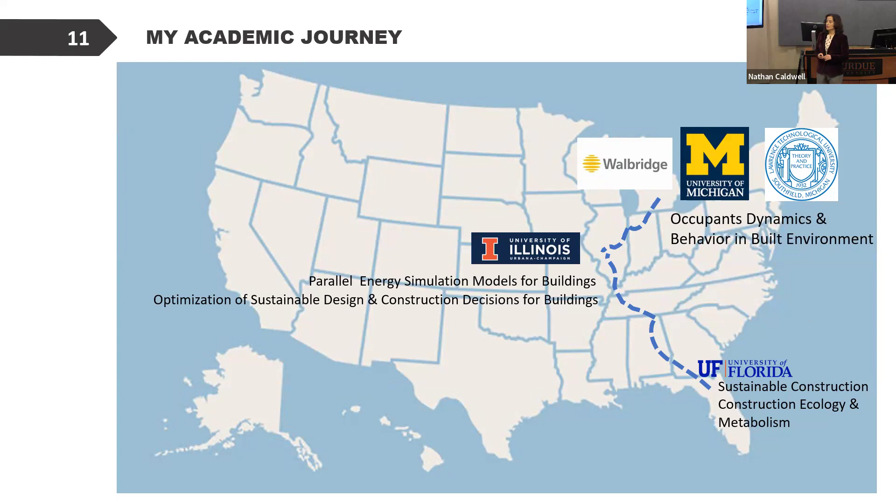Then I moved to University of Michigan, and I also worked at Lawrence Technological University, with a part-time consultancy job at Walbridge. At that time, I was mostly focusing on occupant dynamics and behavior in the built environment. So 2.5 years ago, I finally moved to Chicago, the beautiful city, to UIC, and I was finally able to found my own research lab in building technology and science — the Built Environment and Infrastructure Lab.

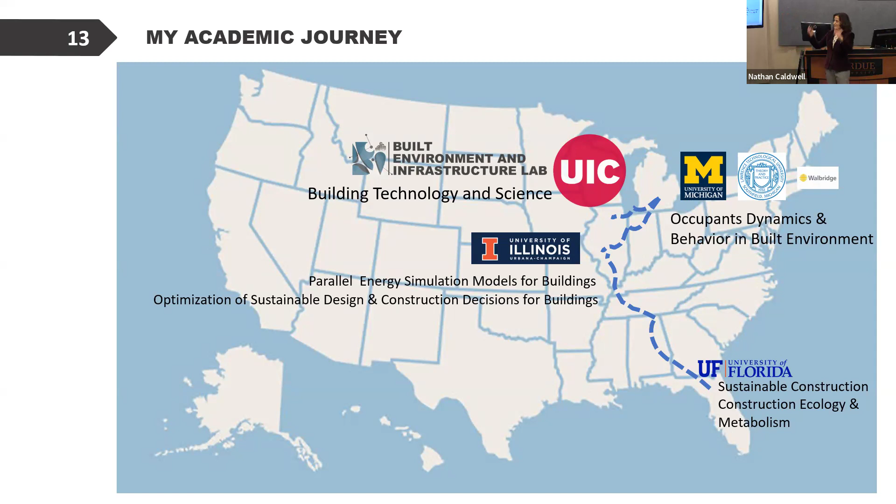So with this journey, starting from the very south of the United States and going north, what I learned is, especially learning the fundamentals of construction ecology and metabolism, then working on these computational simulation models, which are widely used by engineers, designers, architects, etc.

I mainly use Energy Plus to develop my algorithms on top of that. But I noticed that even if it's widely used, it has two big gaps.

One is it doesn't include the occupants' behavior. It assumes that in the simulation programs all the occupants behave in the exact same way, which is not the real case. That causes some inaccuracy between what you usually simulate and what you get in real life.

And then what I also noticed is that these simulation programs also don't take into consideration the weather changes or how the building envelope system will adapt itself over the course of years of aging, and also for future climatic adaptation.

So with this in mind, that's the vision of my current lab. We work on investigating climate resiliency adaptation for high performance built environments, always keeping the human in the loop. And these are some of our collaborators.

This is the main area that we're working on. I want to talk mainly about climate change adaptation and the innovative methodologies that we're developing. That will be the main focus of my talk today.

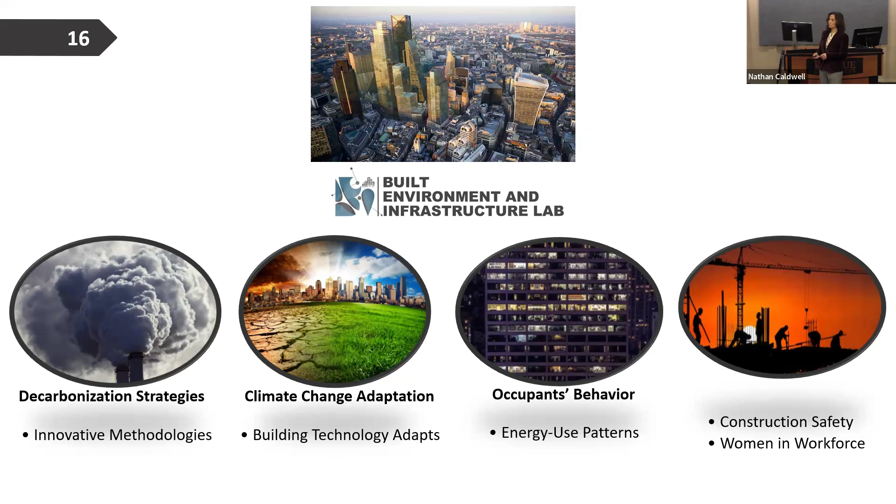We're particularly focused on building envelope systems, and let me show you why first. It's become common knowledge that 40% of building-related energy consumption is coming from buildings, and buildings are also responsible for 40% of carbon emissions.

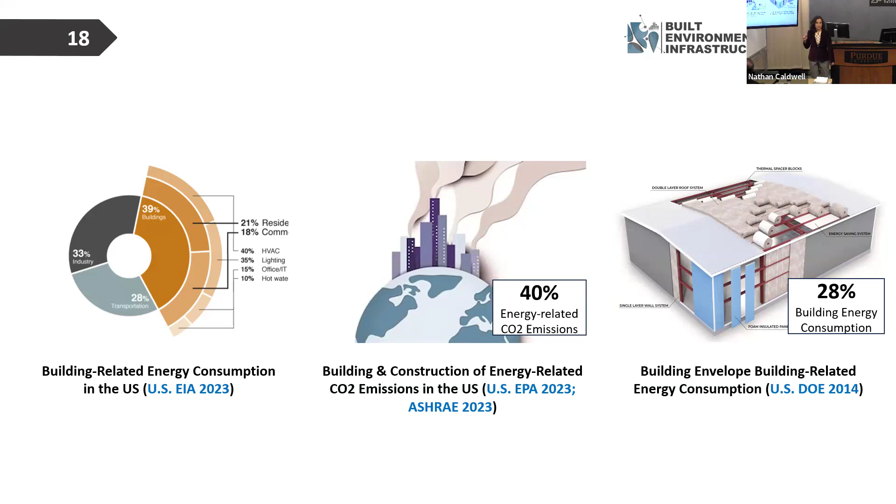Among that 40%, 28% is about the building envelope system. So when we say building envelope system, we're talking about roof, walls, windows, foundation — whatever encloses the building itself.

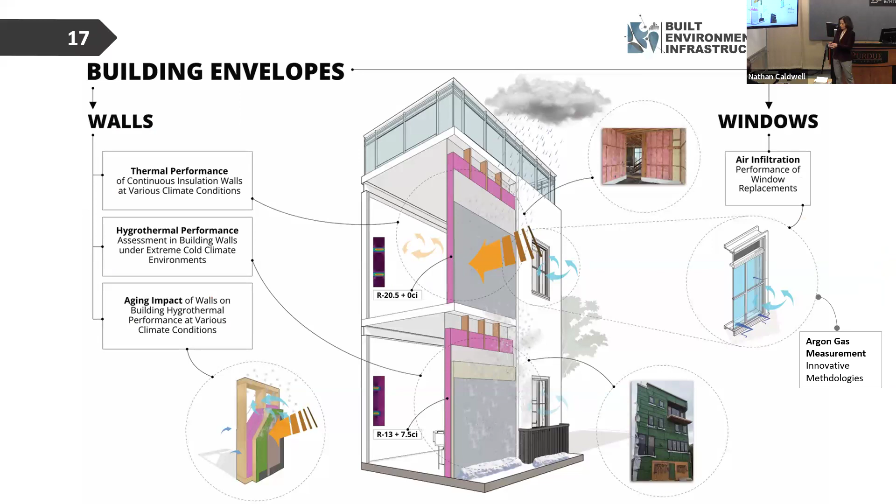But particularly, we're focusing on walls and windows. The reason is that among that 28% of energy consumption, walls and windows make up more than half of it. And if you include some of the leakages, improvements in wall and window technology systems will help us a lot in figuring out adaptation strategies for construction.

As we know, the building stock is getting old and aging in the United States, and new technologies are coming out to improve overall insulation, thermal performance, and moisture performance of these buildings.

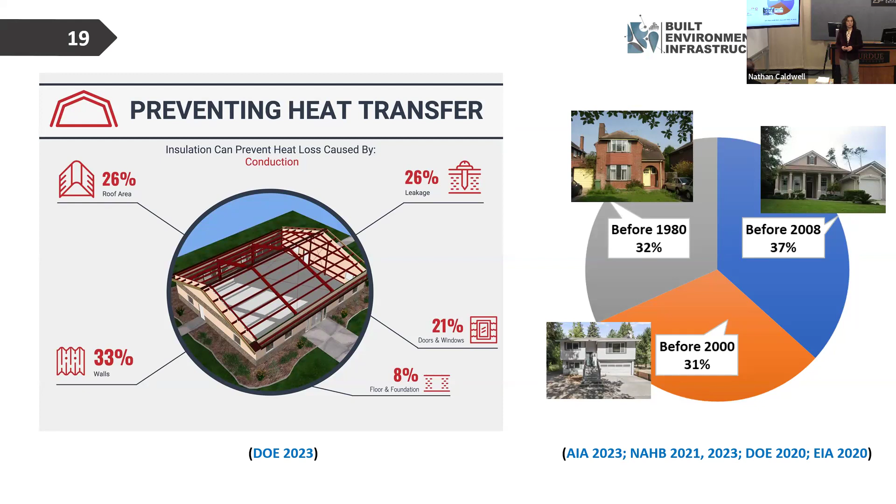So we want to see how these are working and how they're going to perform over the course of the years, keeping climate change in mind.

I'm going to talk about the research studies, but first I want to introduce our two handsome guys — we have two walk-in environmental chambers. This one was made from scratch, and my students and I are very proud of it.

It's able to do tests from -4 to 212 Fahrenheit. This chamber helps us put wall samples and window samples in the middle, and create weather simulation conditions based on ASTM and ASHRAE standards.

The testing sample size we designed for this one is 5 by 5, so anything up to 5 by 5 can go in there.

A couple of months ago, we received a more sophisticated walk-in chamber. It has a wider temperature capacity, which can also measure from -40 to 212 Fahrenheit of weather conditions.

On top of that, we can also simulate wind and rain experiments in this environmental chamber, so it has a wider range of testing capability. We have two rooms here.

One side represents the indoor air quality and indoor weather conditions, and the other side is where we change the outside weather conditions based on whatever we want to simulate.

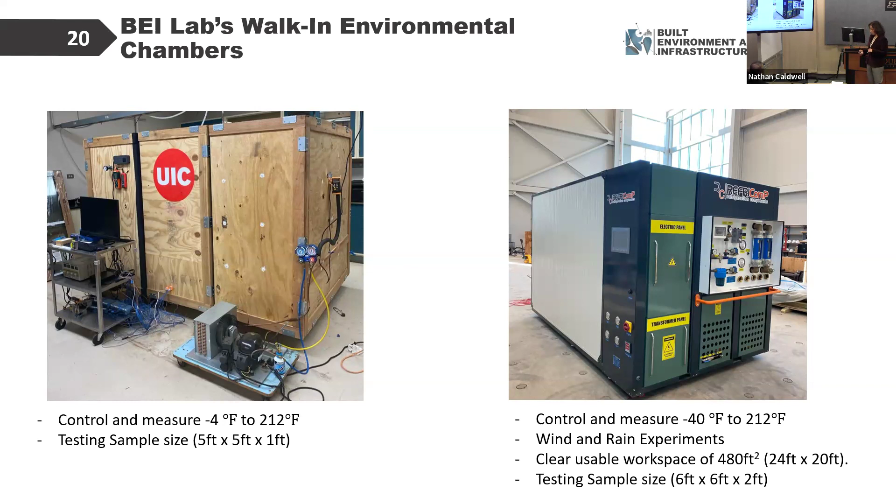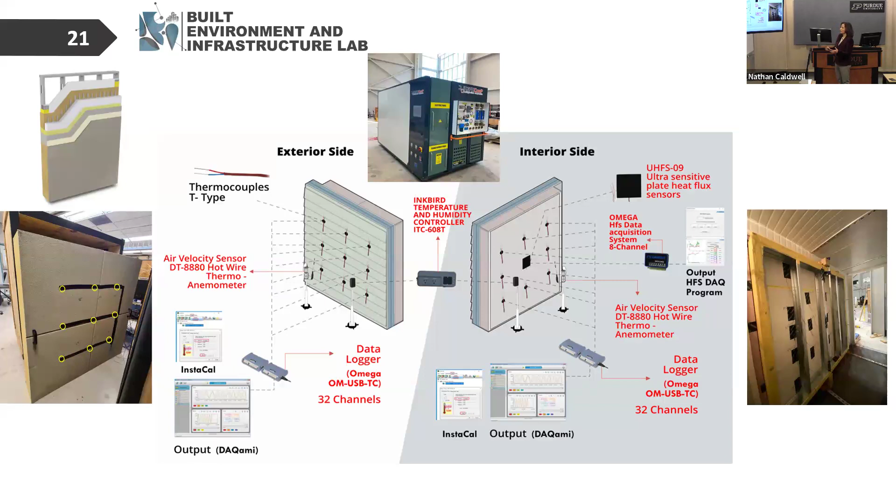This is kind of typical how the experiments look like when we do experimental stuff. So we have the two sides: this is the interior, representing room temperature and room conditions, and this side represents the outside temperatures. And of course there's a very complicated, sophisticated data collection system in the background that helps us run these simulation models.

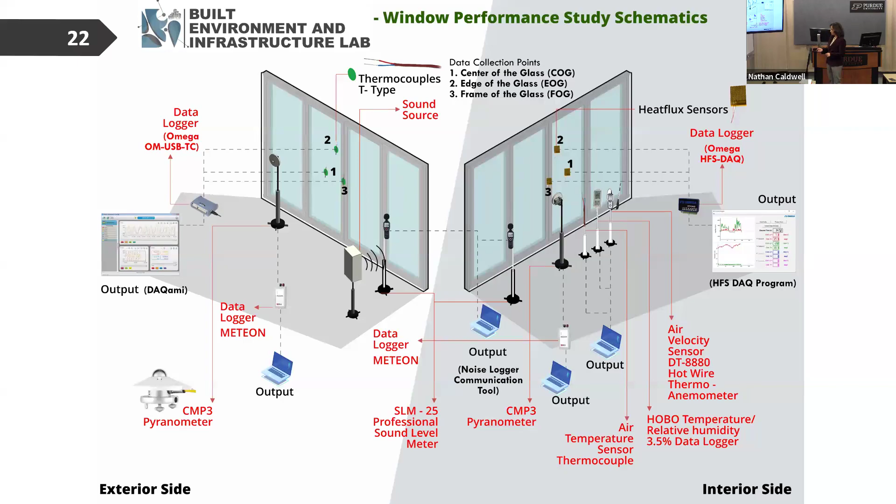Okay, so let's start with walls. I'm going to talk about walls and windows. Walls is going to take a little bit more time than windows, but I'm going to give you an idea of what we are doing, a taste of what we are doing.

With the walls, we were actually approached by a big industrial construction company. I don't know if you're familiar with industrial construction, offsite construction—anyone heard about it? Modular, maybe a student, or of course the professors. I believe it's going to be the future of construction, especially after COVID. We found out there are so many advantages of these industrialized offsite construction systems over the traditional ones. And once we were approached by this big manufacturer of panel technology, we got excited because they said they have some unknown territory that they want us to explore.

But let me show you, especially for students who aren't familiar with what I'm talking about, I'd like to show you this very short video to demonstrate how the manufacturing process, transportation process, and installation process works with these industrial construction wall assemblies.

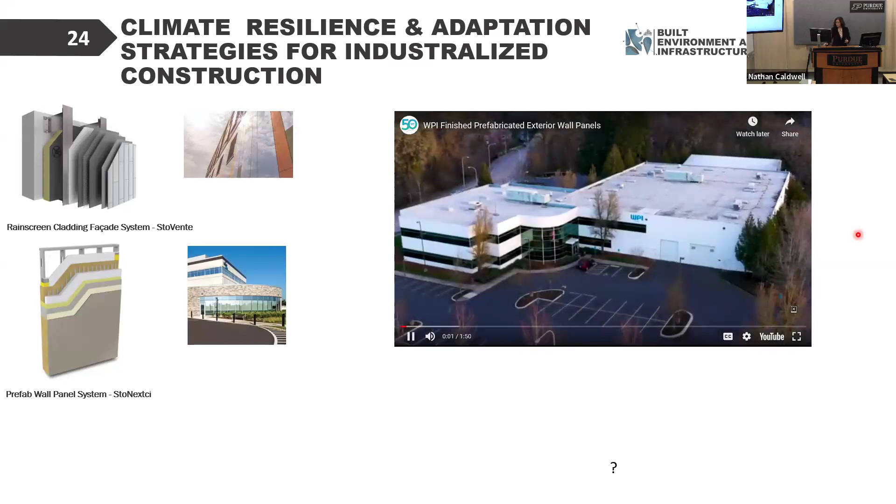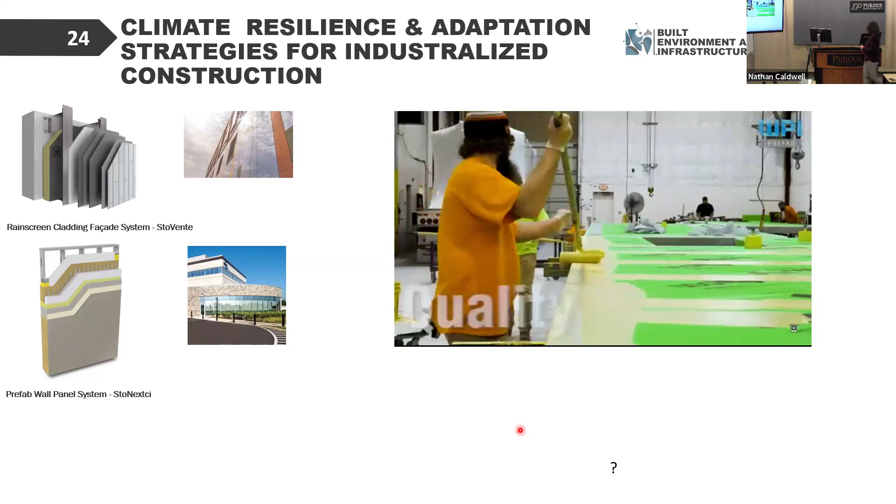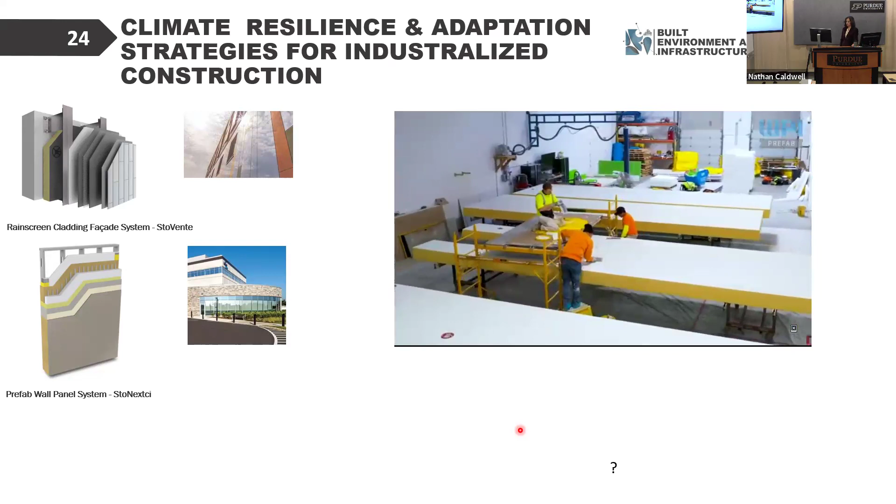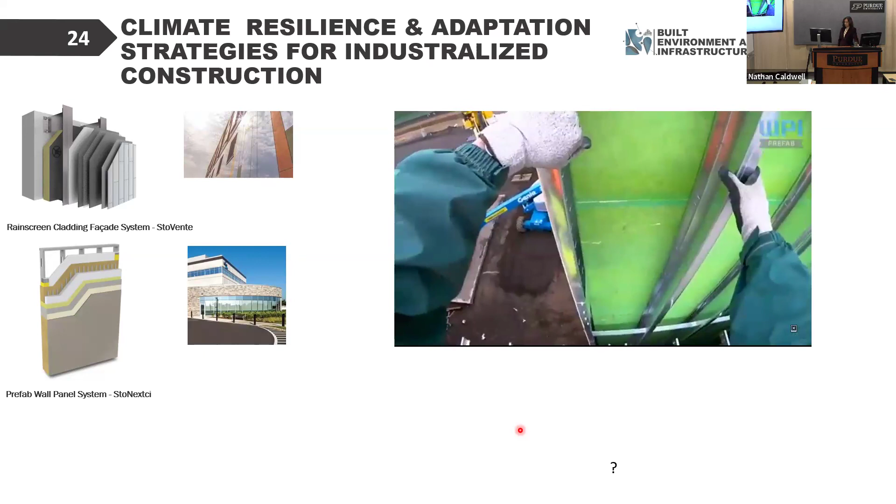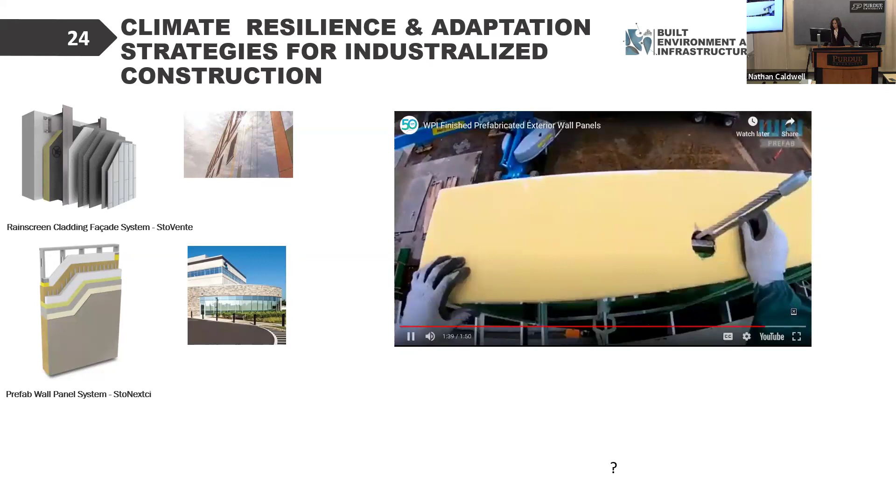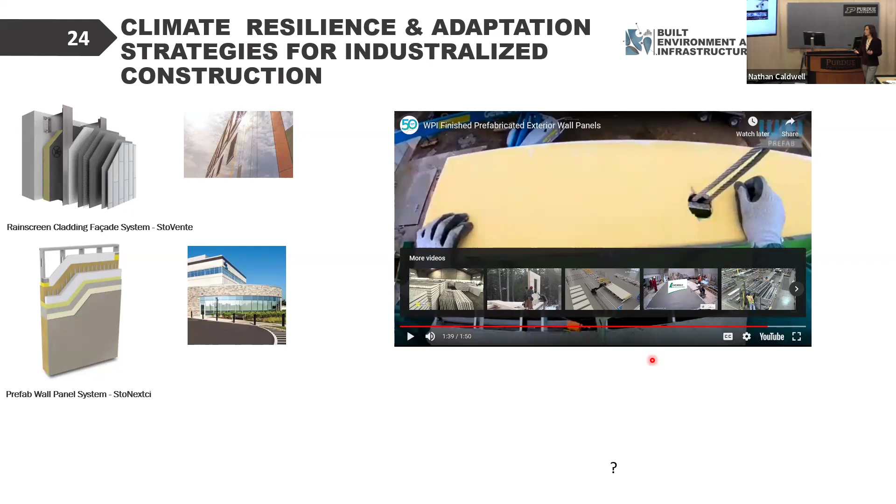This is another rain screen system, as they call it. Again, it's a very similar process, used for a variety of buildings like hospitals, high-rise buildings, warehouses, residential buildings, you name it. So that's the thing that we started working on. And then we got a question from the manufacturer—let me move on to the next slide.

The question we got from the manufacturer is that, in the industry, they mostly find the thermal performance of this kind of wall assembly and window assembly using a software called Therm. It's a widely used software for designers, engineers, and architects, and they measure it based on given drawings, technical drawings, and specs to find out the thermal performance, mostly measured by R value, thermal resistance—the higher the R value, the better your wall is performing. But they were saying, okay, this is a widely used version, but we believe the software isn't actually reflecting what the actual thermal performance of our wall panels are.

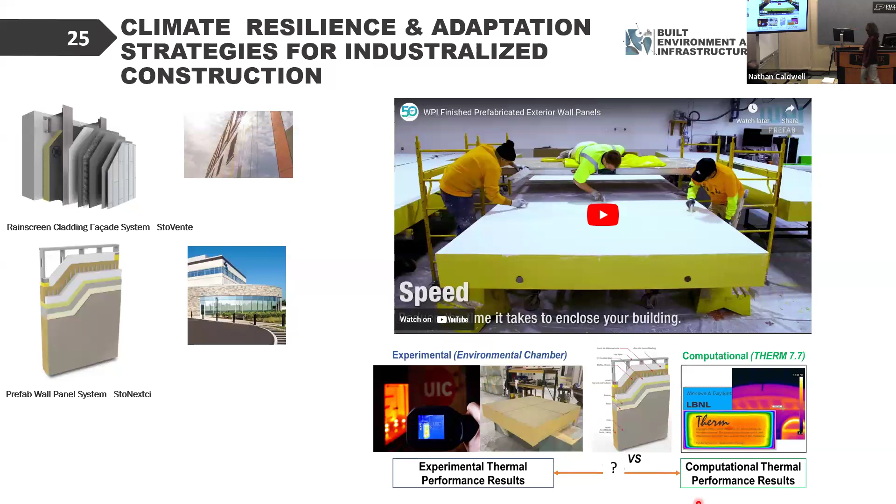Because they believe this testing is mostly done for traditional assemblies like precast concrete, etc., but maybe not actually calibrated for prefab wall panels, we decided that we're going to test these.

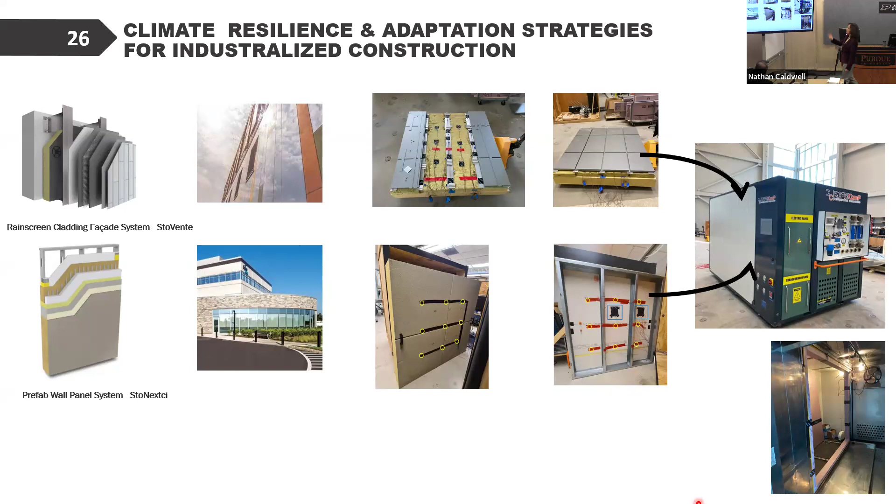I call this like a surgery. We receive these wall panels, open them up, and place our sensors inside - heat fluxes, thermocouples, etc. Then we measure their thermal performance in our environmental chamber. This is how the inside looks like: these are the two rooms I was talking about. This part represents the exterior weather conditions, and this part represents the indoor environment. Your wall comes in like a regular building, positioned in the middle, and then you start measuring the thermal performance if that's what you're asked to measure.

And then there's the simulation part. I'm just going to skip a little bit more on the methodology and get into the results.

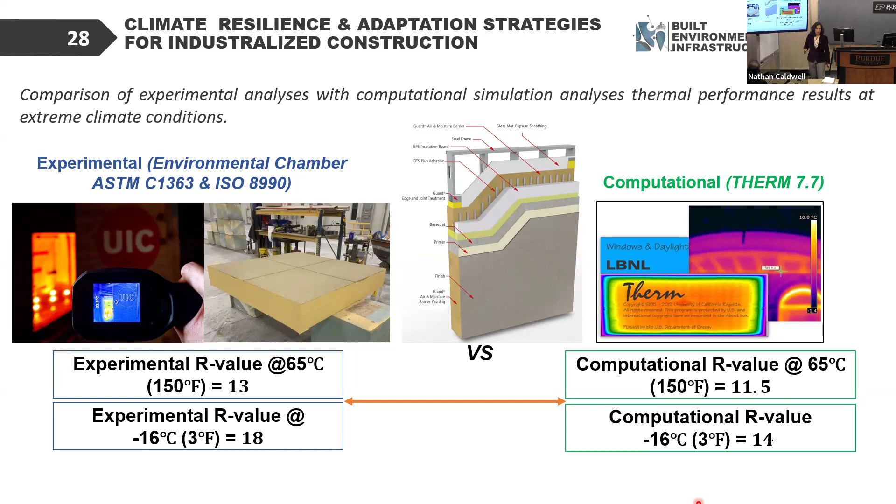Based on our experiments and ASTM standards, we tested them in the range of 65 Celsius to minus 16, or 150 Fahrenheit to 3 Fahrenheit. Those were the boundaries we selected for the Chicago area - the average lowest versus the average highest, including solar radiation. We did the same thing in the computational environment, and found a 17% difference between the experimental versus the computational results.

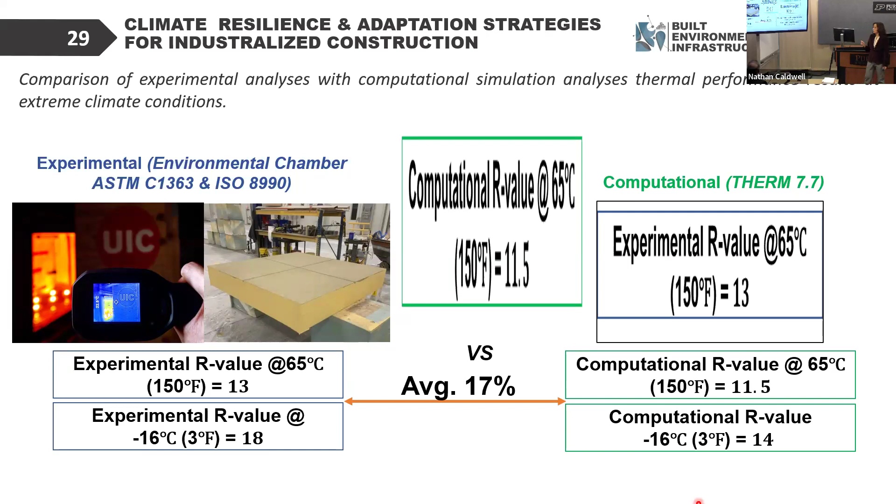That 17% R-value discrepancy is not something you can ignore because it has many implications. First of all, if you underestimate the thermal performance of your wall systems, you'll want to go with a higher capacity HVAC system. That brings along extra utility bills, extra initial costs, and maintenance will be more costly than having something more ideally sized based on the overall performance of your walls.

We specifically worked on hospitals for this case study because the wall we analyzed was mainly used in hospitals. We put this into a typical reference building in Energy Plus, and tried it with the experimental R value versus the computational R value over the course of the life cycle - which could be around 50 years, but from the owner's perspective, 15 to 20 years makes more sense most of the time.

We found that if you underestimate the R value of your wall system for typical hospital buildings, you're basically missing $400,000 from utility bills. That's the equivalent of annually taking 22 cars off the road, or 19 households' worth of electricity consumption. So that 17% discrepancy, if you underestimate the R value or thermal performance of your building, may cost you more money from the owner's perspective.

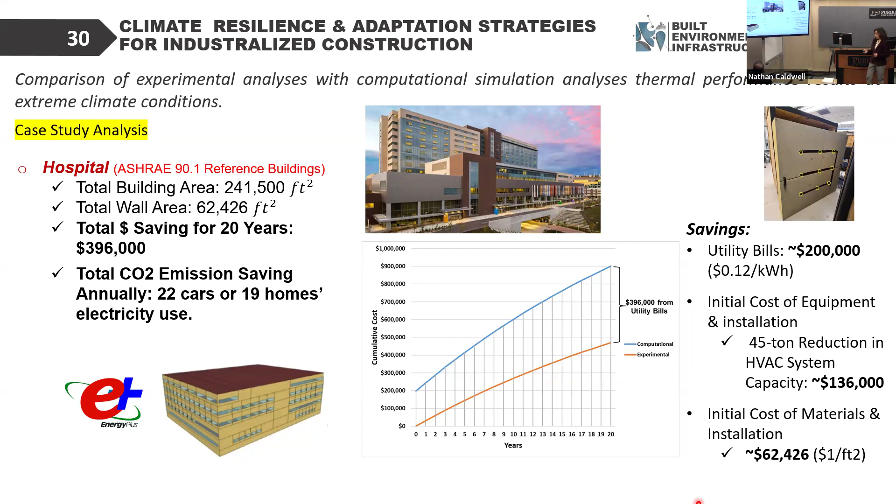After completing this, we asked another question - we're still working on this project, by the way. We're trying to understand what specifically causes that discrepancy, and what needs to be improved or calibrated in the computational simulation environment so it matches the experimental results for industrialized construction prefab wall panels.

We also asked another question about heat waves - the resiliency of these walls. I think this is very important information: heat waves in the United States killed more people during a typical year than all other natural disasters combined. The walls and windows play a major factor when you're sitting in your house or building and exposed to a heat wave.

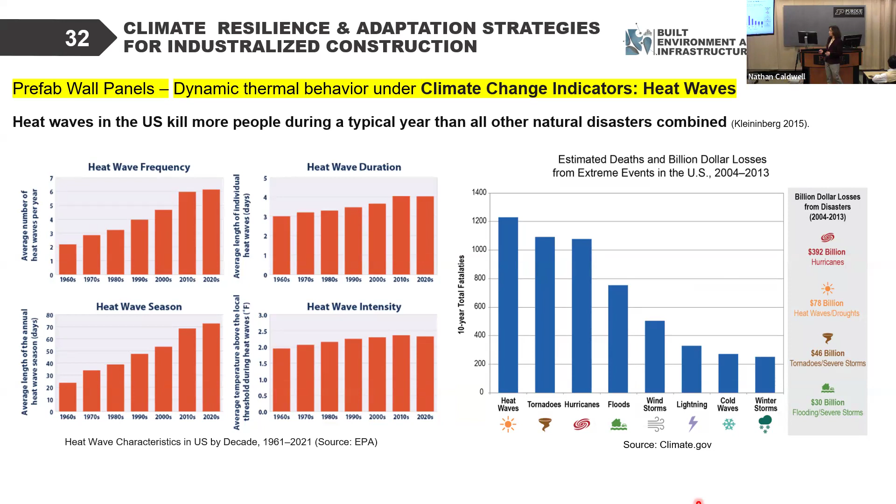So to measure that, we focus on 2 variables. It's kind of different than the R value, because with this heat wave phenomena, you need to understand how the wave is going through your building. So this is your wall, and this is the outside temperature, and the wave is coming in big sinusoidal waves. You want your wall to minimize it and have it penetrate through to the inside condition as little as possible.

So with this one, we have 2 variables. We measured the time lag, and we also measured the decrement factor. Time lag is basically the difference between the 2 peak times in your sinusoidal waves, indoor and outside condition. Decrement factor is the ability of attenuation of your sinusoidal waves compared to inside and outside. You want your decrement factor as low as possible, as minimal as possible. And you want the time lag as long as possible, or as big as possible.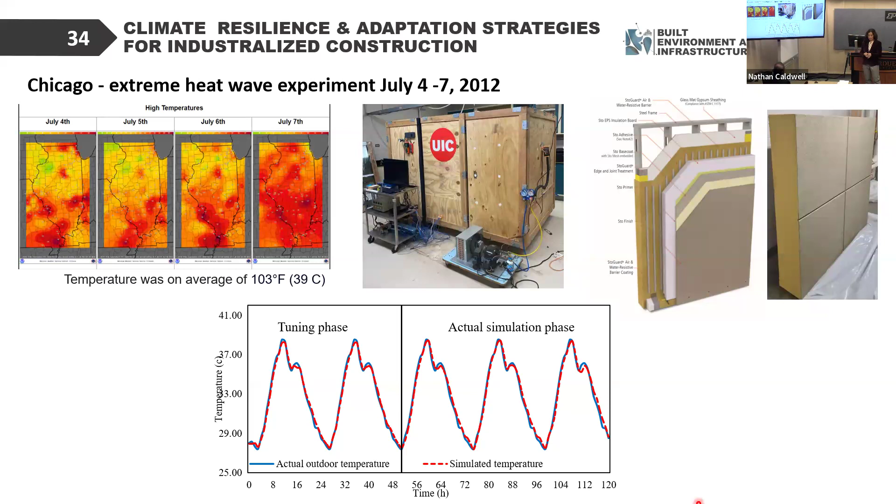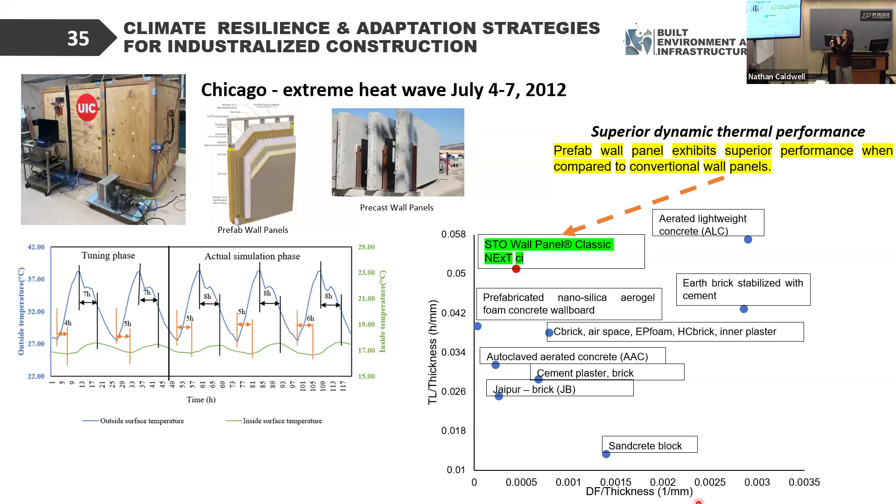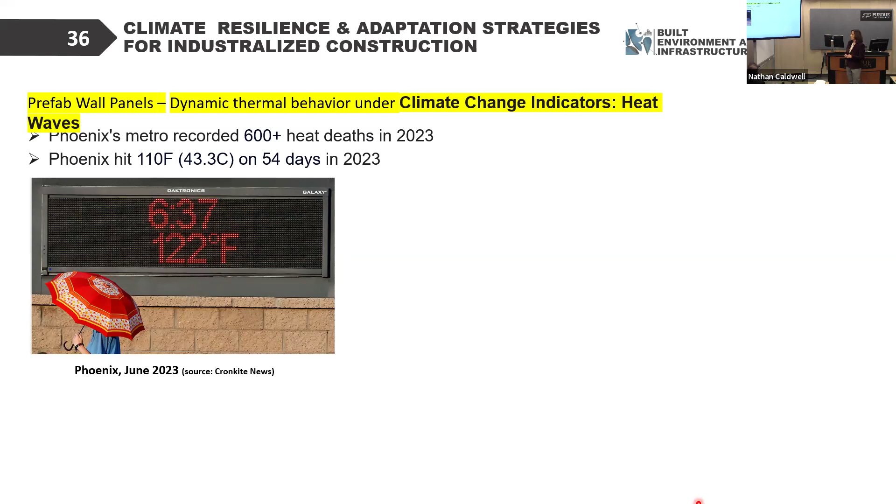So Chicago was one of the heat waves, kind of shorter, a 4-day heat wave. The other one happened last summer, which most of you heard about in the Texas, Arizona area, and that was a pretty devastating one. Phoenix hit 110 Fahrenheit, which is 43.3 Celsius, for 54 days. The intensity and length of it was pretty long, and unfortunately it caused more than 600 death tolls in 2023. So we wanted to see how this works.

But this time, instead of only simulating the outdoor temperature, we also wanted to add the solar radiation, because you can see the total difference with or without solar radiation. The orange one is the solar radiation, which makes it peak as high as 71 Celsius during the day. Your outside temperature can be around 40, 43 Celsius, but including the solar radiation, it peaks up pretty high. We simulated this for 2 weeks in our environmental chamber, and you can see how the outside temperatures and the actual outside in our experiments are very well matching.

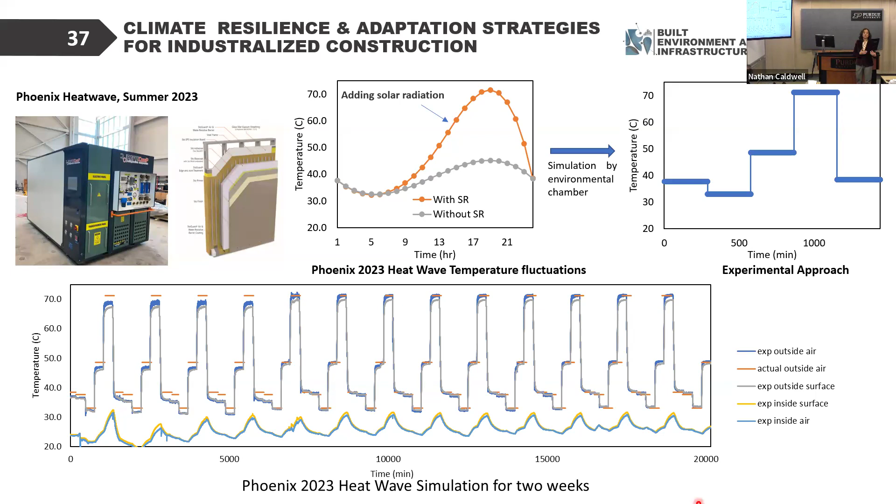This is an ongoing study, so we will measure 2 more samples like this. We try to understand how much heat is being stored, rejected, or exposed to the wall itself, and what we can do about that. Can we utilize the energy that the walls are being exposed to? Can we redirect it to something else in the house? Can we charge our phones with that energy? Can we store it to heat the water maybe? So this experiment specifically is going to focus on the heat storage system of the walls, and see how we can utilize the heat storage capacity of the walls for future applications.

Okay, so this was the hot weather conditions, and then we also flipped the coin.

And then we want to see how these wall panels are working in cold weather climate, because that's the other end of the boundaries. For this one specifically, cold weather, the phenomena is... I talked about decrement factor and time lag for the heat wave. For the cold weather condition, the problem is mostly the moisture.

Because when you have moisture kind of penetrate through your walls during the summertime or during the rainy season, and then when it gets frosted, you will have the water trapped inside of your house, inside of your building, inside of your wall, and then it starts accumulating and creating moisture or mold issues for your building. And mold, again, it's really bad for the occupants' indoor air quality. It directly affects their health, and it also damages the structural integrity of the building itself over the course of the years.

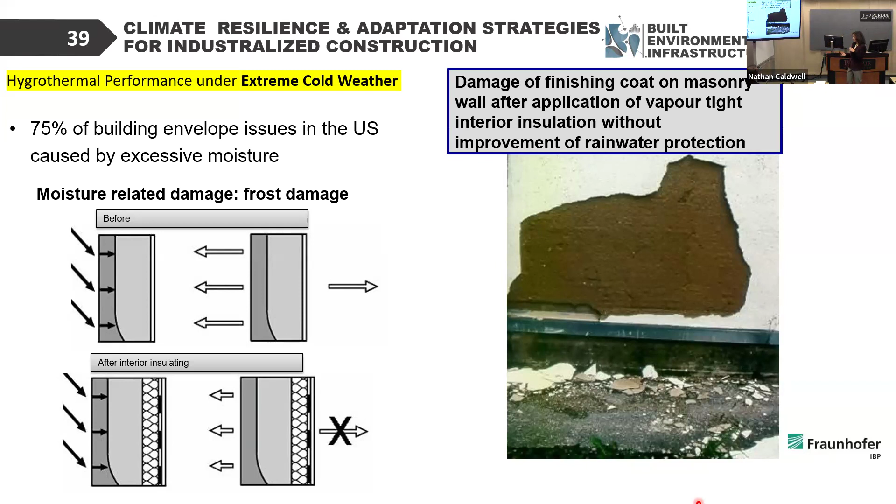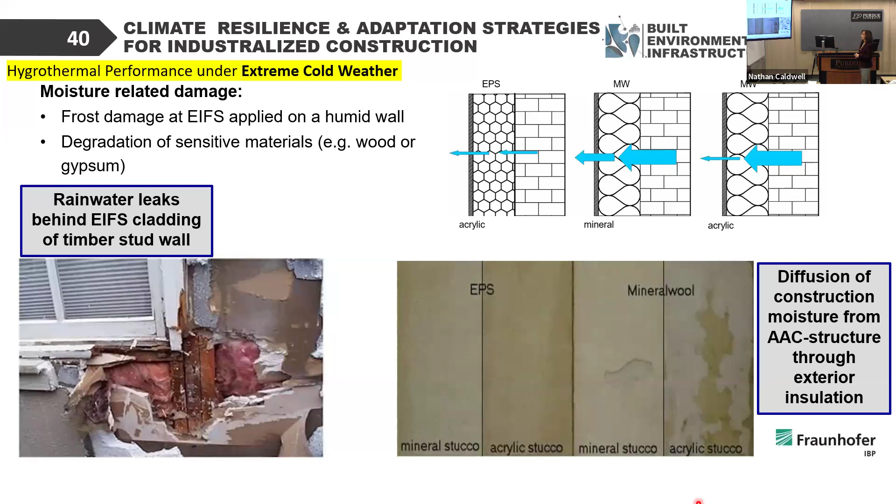And this is, again, some of the frost damage examples, showing how they've been affecting your building, and what happens if you let it go through over the course of the years. This is especially a bad phenomenon with cold weather conditions, because once it gets frosted, there's no way for the water to let go to the outside, and it starts accumulating moisture, and then mold, by the end of it.

So for this one, we did work on one of the advanced building materials, vacuum insulated panels, VIPs. Has anyone heard about VIPs before? Yeah, vacuum insulated panels. Actually, they've been widely used for insulation purposes, like for your cooler, for refrigerant systems. But then, in the last 10 years, they started looking for applications specifically for buildings.

They're very fragile, though. And then they try to get rid of all the air that's able to be in your insulation, and then it can kind of superior or double the R value, the thermal performance of the VIPs.

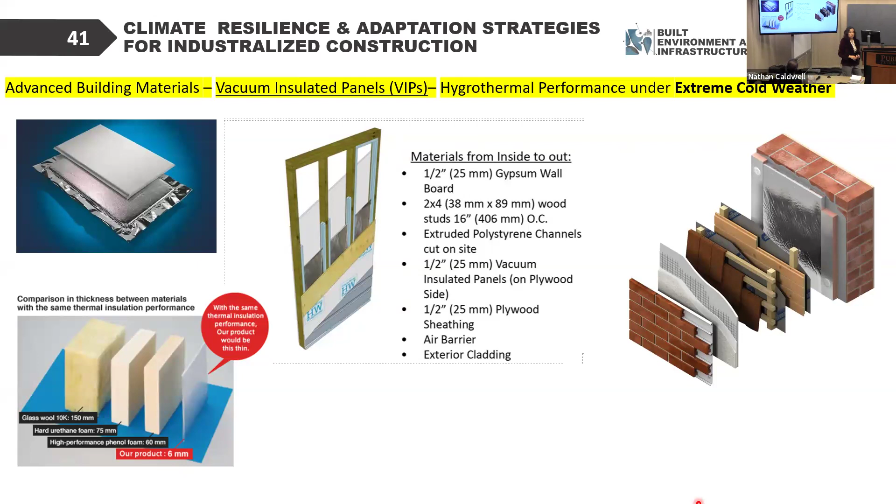So what we did here, we worked together with NREL and Alaska, and also the Cold Climate Housing Research Center. They developed their own VIP panel, and then they also put it on a nice prototype housing unit. So they claim that the R value of this wall is 76, which is phenomenal.

For example, if you have an R value of 15 or 20, that means you have okay, good insulation. If it's 30 or even higher, that means it's pretty good. So having R76 is really, really good for the Alaska region.

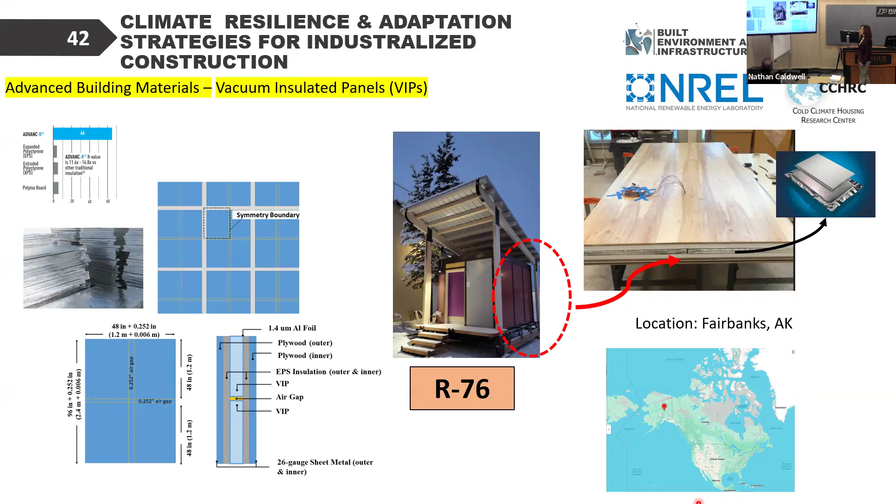But the question we asked was, okay, so the R value is pretty high, which is amazing, but would they still work in these extreme cold weather conditions? Because they still get rain and then freeze-thaw, etc.

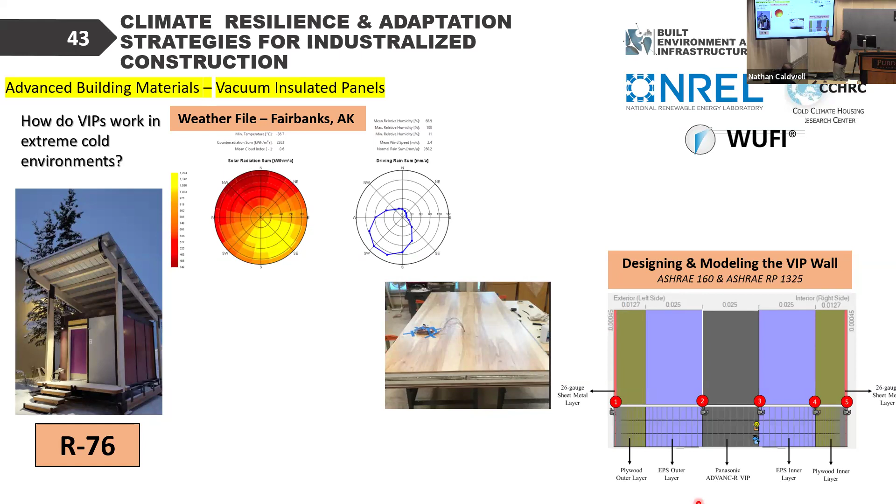We have the weather file we insulated, so we install it into our software system, and then this is this wall here. They have the metal panels outside of it, and then we simulate it layer by layer in this simulation program, from outside to inside, to see what's going to happen as the water travels through your wall. And this is the result we got.

This is the time isopleth graph, a very typical moisture water content graph that you want to see. For the first and second layers, from the outer layer all the way to your VIP panel, we don't see much of a problem with moisture. So we want to focus on what's going to happen starting from where it penetrates through the VIP panel, goes through additional insulation, and then through the interior side of the wall.

These are our temperature to relative humidity graphs, and this is the moisture accumulation. You want your moisture to stay below this benchmark line. For this example, we're good at number 3 and number 5, which is the interior side, and right after the cold weather goes through your VIP panel. But the problem starts in the layer between the VIP and the interior drywall or metal sheet plywood. You don't want them to go above this line - if they do, that means you may have potential moisture problems with your assembly, with your design.

We also have this nice 5-year prediction based on this analysis. The top one shows how the temperature is going to change, and this one shows how the water content is going to accumulate over the course of 5 years. Let me show you very quickly how they're changing.

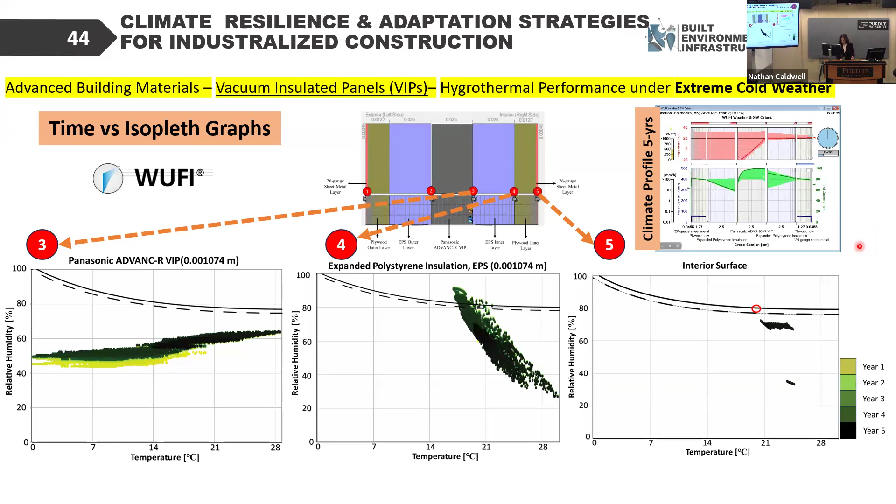We have this traffic light system showing what will be the risk of mold growth. For the top, the outer layer, we don't see any mold growth issues. But inside, this tiny house, we do see a medium risk of mold growth, meaning there's a possibility of frost problems on your traditional insulation attached with your VIP panels, which leads to mold growth and a deficiency in your R value. So they need to look for better alternatives to let water or air travel through, because you have a very nice high R value, but apparently it causes water to get trapped inside your wall panel, and you don't want that.

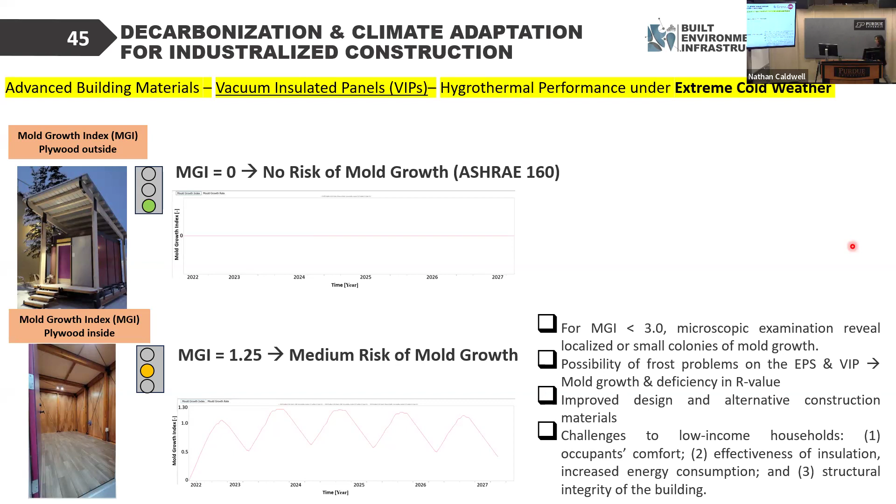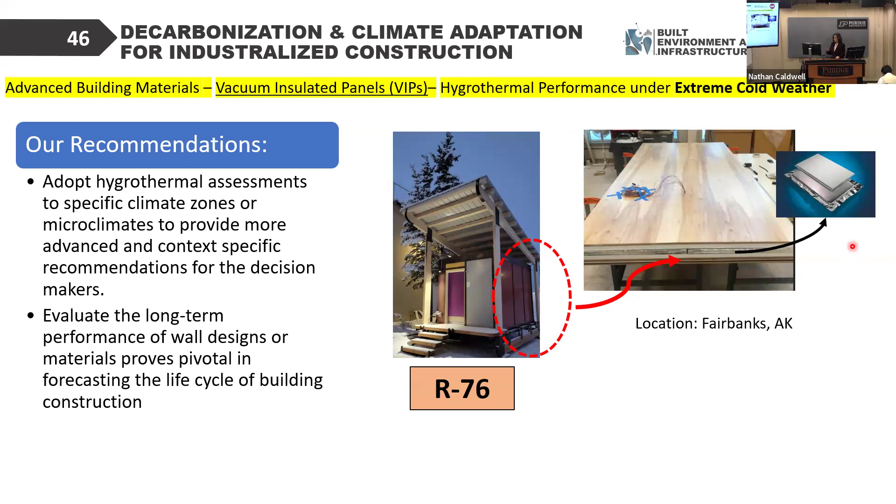We also made some recommendations. Again, R value is a great measurement, a great metric - everyone is very proud of it. Higher R value means better thermal performance, but it should not be the sole metric for your buildings. The moisture content, water content, should also be analyzed before your product becomes available in the market. So that was the recommendation for these wall panels, the vacuum insulated panels, before they become available in the market.

Okay, so I've completed the walls part. Again, I mentioned that we're doing a lot, and I just want to talk about a few of them because of the limited time we have. I also want to talk about the other part of building envelope systems that we work on - the windows. I'm going to talk about two projects today. This one, we're working with Oak Ridge and DOE together.

And then we try to understand the air leakage, the impact of windows on the air leakage of your houses. Why is it important? Because air infiltration through building envelopes is responsible for 30% of your energy in a typical residential building. But the thing is, we don't know what happens when you replace your windows. What will be the impact?

Which was kind of interesting to me when we started talking with Oak Ridge. We're going to do this study because I thought that's supposed to be well studied before we go with more advanced, complicated versions of window installation systems, etc.

If you have this uncontrolled air infiltration, air leakage through your house, that's first of all going to have problems with moisture accumulated in your building. You're going to have cold drafts, which I do see a lot right across the street, near the restaurant we went to last night. I think the houses are getting pretty old on that street, and they started covering them with plastic sheets, etc., to kind of prevent this. But unfortunately, I think they're going to have more moisture issues even if they try to keep the cold draft away.

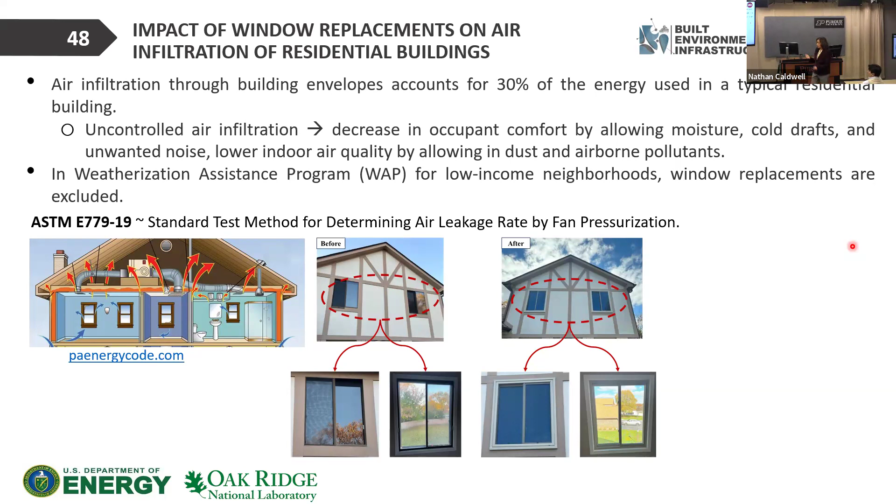So with this in mind, we did a field study we started with. We analyzed 10 houses up to this point, and the results we got before and after replacement were actually kind of diverse. Some of them showed great improvement when the windows were replaced, some didn't show that much, and some were outliers, like 40% or something.

This is one of them. Our team was very surprised by the result, pleasantly surprised. So then we talked to DOE and Oak Ridge, and we're on the way of getting an additional grant because we said we need to analyze more houses in the field. And then we also want to test some of them in our lab, in our environmental chamber, in a more controlled environment, to see what kind of variables are actually impacting this diverse air leakage improvement for the windows specifically.

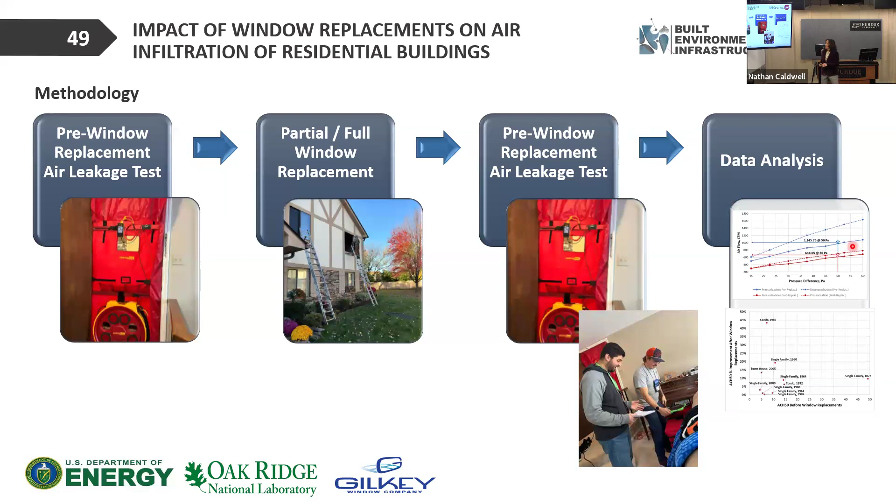So that was the air infiltration one. And then we also work on innovative methodologies. My very nice colleague, Dr. Özevin, she's the director of the non-destructive evaluation lab at UIC. We're working together on a lot of projects. This is just one of them.

And in this one particularly, we're focusing on the argon gas in the window. When you have IGUs or window systems, they're mostly filled with argon or krypton. Krypton is less common, but argon is used to increase their thermal performance.

And when you have them filled with argon instead of air, you're going to increase, this coming here, 7% improvement in the overall performance. But we don't know yet at this point - the manufacturers claim that when you want argon-filled windows, they say this should have at least 90% argon in it. But we still don't know when they arrive on site whether they actually have that much argon in it, or what happens, or how they degrade over the course of the years, which will again leak over the years, which will have an impact on the energy consumption of your building.

So there's one analyzer available in the market, the existing methodology, to measure this argon gas content, which is around $40,000 to $50,000. It's very hard to get it, it's not accessible, it's not affordable. And because of that, not many people know about the quality of the windows they receive.

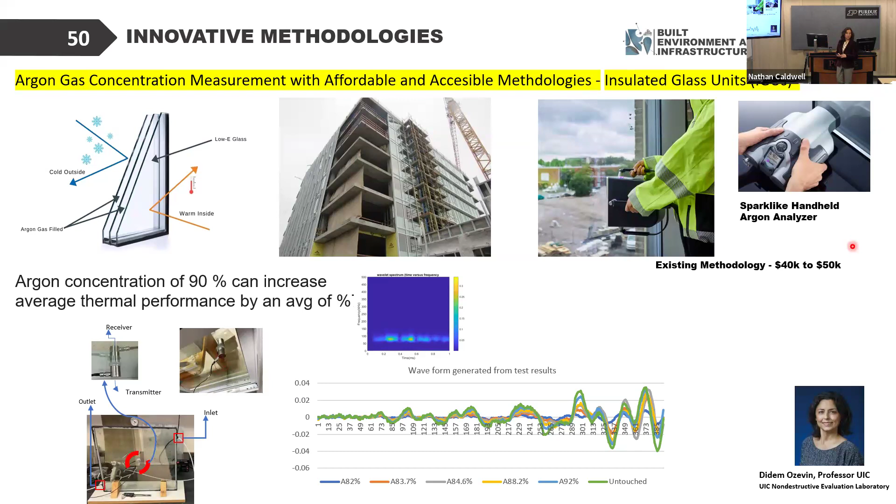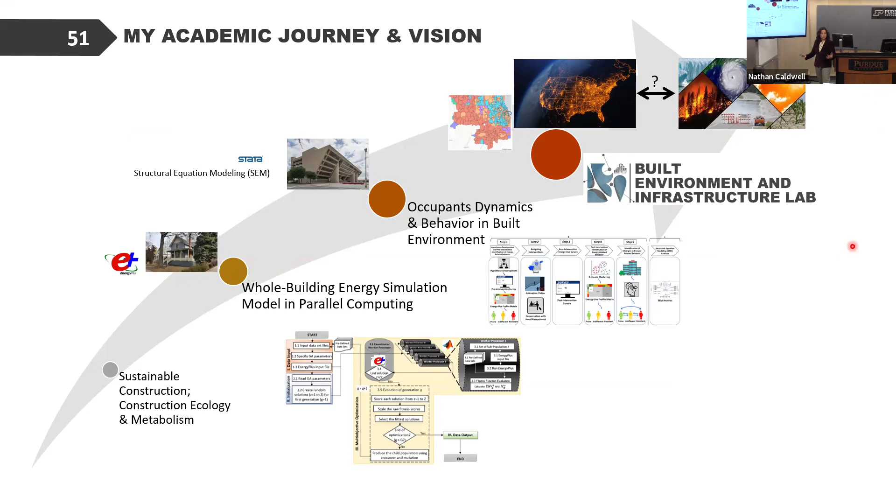So now we're tying back to where I started. My academic journey, as I mentioned, continues with the Built Environment and Infrastructure Lab. With all these years of training, education, and experience, I'm trying to find a way to integrate these in a simulation environment with experimental results, field results, and computational results.

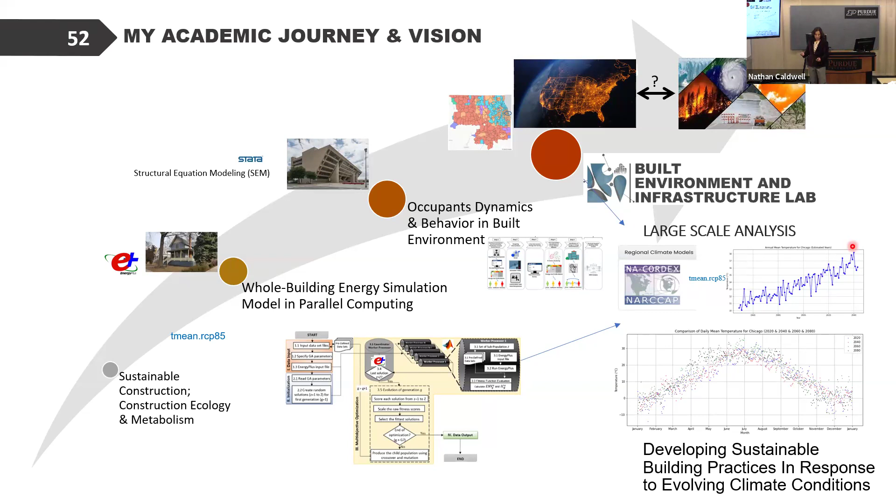So all these things we're working on - my ultimate aim is to integrate this with evolving climate conditions, and see how we can improve existing computational simulation programs to have better, more accurate estimations, and hopefully get better building codes, energy codes for the world, for the building technology and science environment we're in.

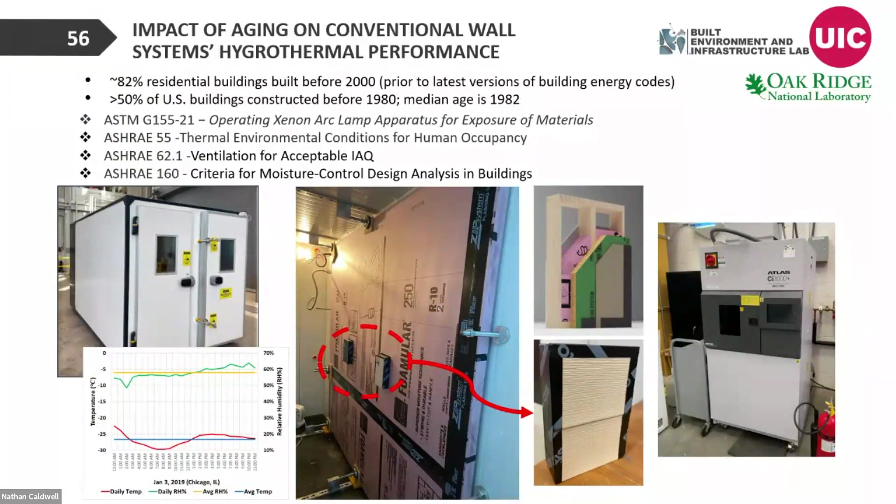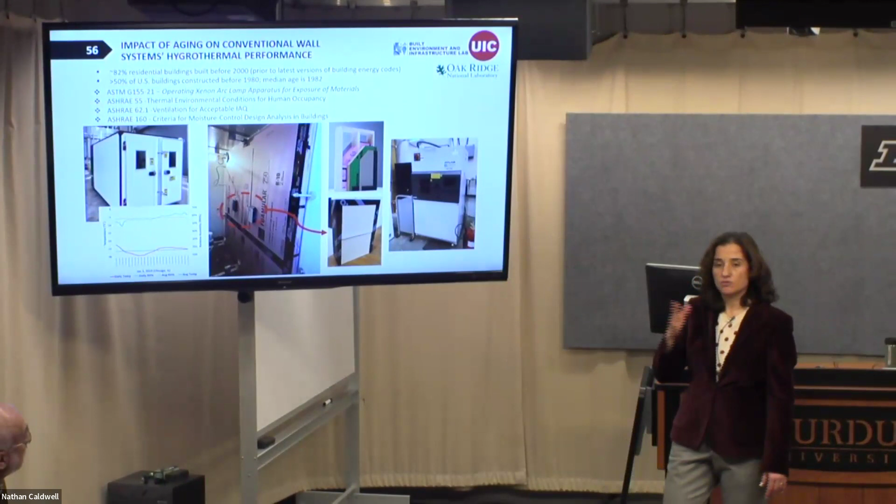We developed these mini walls, kind of traditional walls with continuous insulation on them. Continuous insulation isn't mandated in all states yet, but it's becoming an adaptation—adding this pure insulation without any breaks or stops—which improves overall insulation performance.

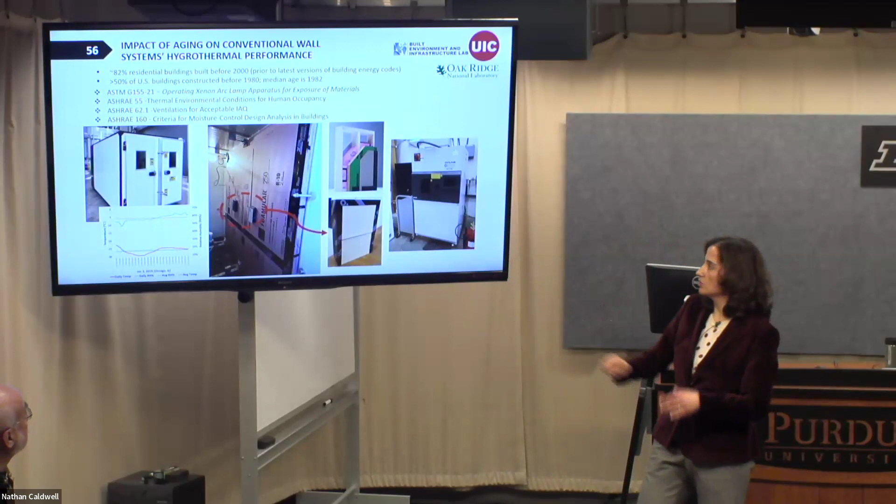So what we did is develop these little tiny walls and put them in our environmental chamber, running ASHRAE thermal conditions experiments. The next step is we're going to send them to Oak Ridge. They have weatherometers that simulate six weeks of exposure to solar radiation, wind, etc., to age your product.

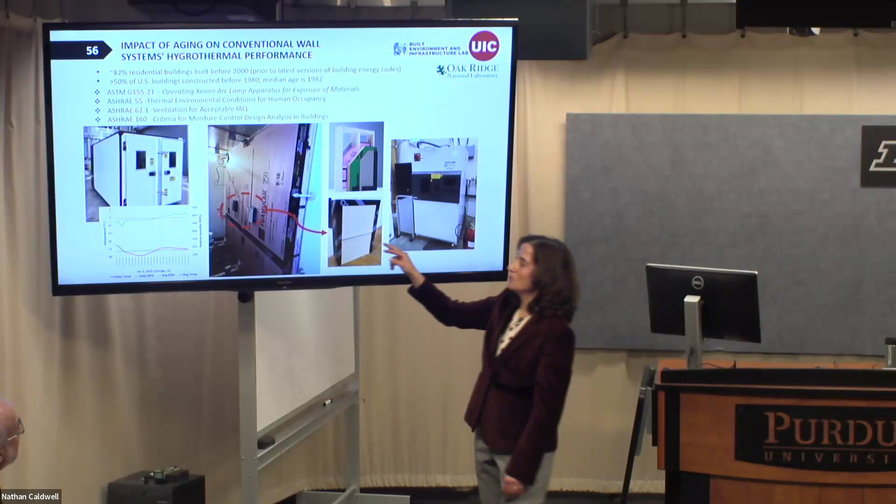The walls are mini because of the size of the chamber. They'll send it back to us, and we'll measure their thermal performance one more time to see what happens after that aging.

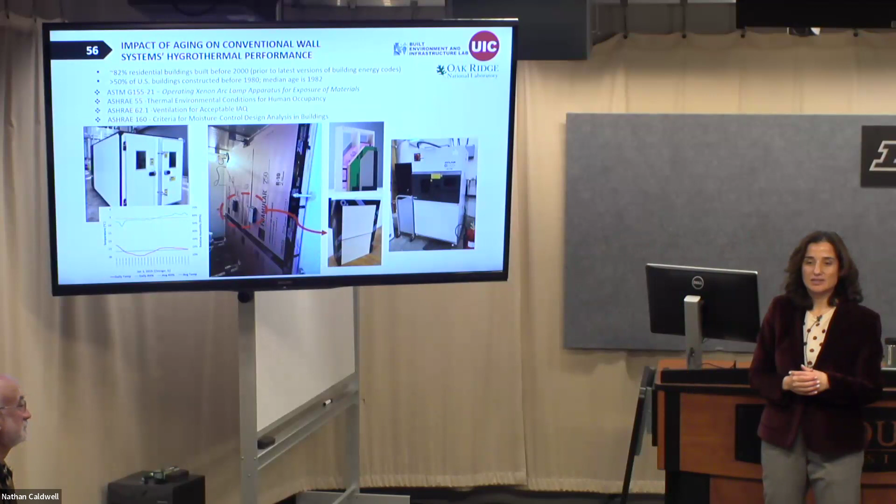My ultimate goal is having a nice, continuous data collection facility, maybe changing the different walls or insulation systems, done with some of the big labs, to see the effects and how degradation happens in real time within a traditional house. But right now we're working at this scale—hopefully it'll give us an idea. That's the first step toward understanding aging performance.

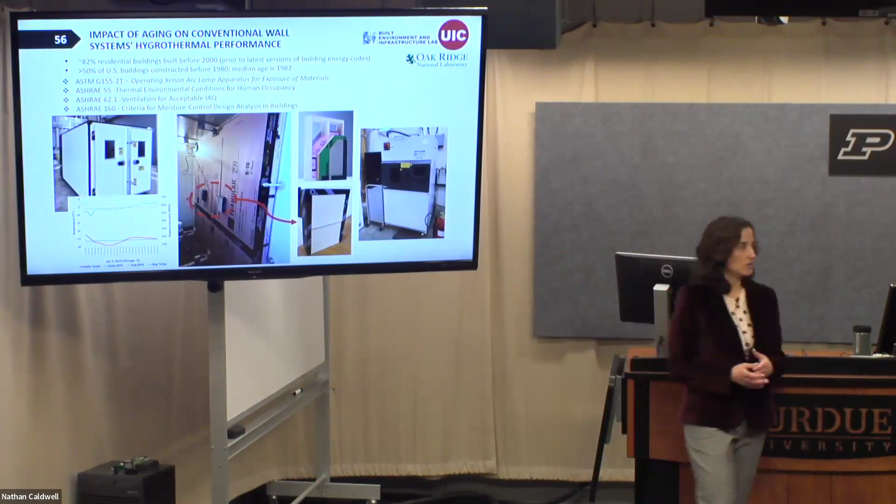I want to ask, why do you really focus on prefabricated material? I believe prefab has not been scalable in all other countries—it's very much used in Europe and some parts of the US. I believe there are other materials that perform better than traditional construction methods and are also more affordable. There's quite a number of research studies on prefab and modular construction, and I had the opportunity to be part of research on the cost of modular construction in places like Africa—it's not affordable.

In fact, some parts of Africa don't have anything to do with modular or prefab material. So I'm thinking maybe you might look into other materials that can be scalable to other parts of Africa and other countries that aren't as rich as the US. Thank you so much for your question.

I'm glad you referred to Africa, because the reason I say this will be the future of construction is that it's already widely used in the US, but not yet in some countries or continents. But the good news is that the big manufacturer we work with is going to open a big factory in Africa very soon. So they're working on it. That being said, these are going to be affordable and accessible materials, not only for developed countries but also for developing countries as well.